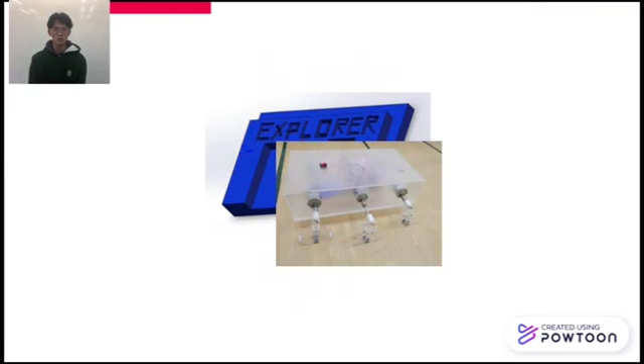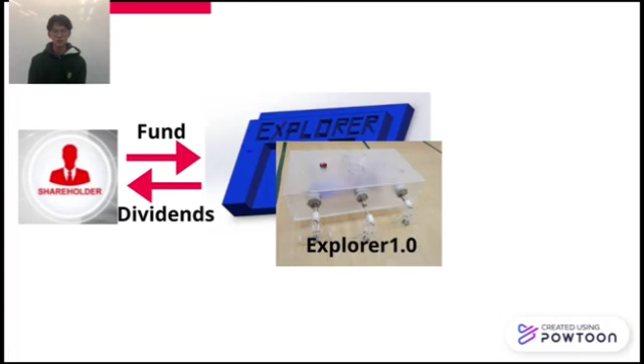There are two sources of investment. The main source of funds is from shareholders. Investors can buy shares of our company and provide funds for us. We will receive dividends once we make profits. In addition, since the project is a member of Shanghai Science Society, it is very likely that this organization will provide assistance for future development.

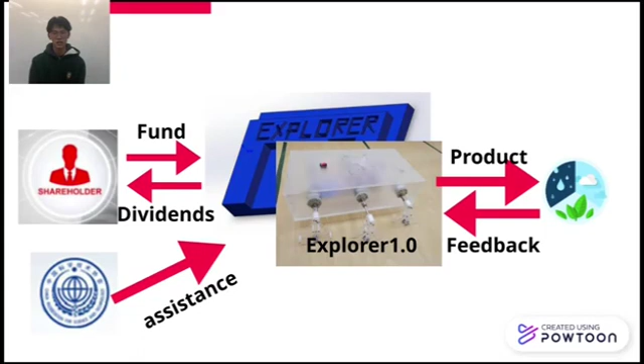After receiving enough funds, we will produce 25 Explorer 1.0 units for examination and development. We will sell these robots to environmental monitoring organizations for testing and seek improvements based on their feedback. After perfecting the design of the robots, we will produce the final product at a large scale.

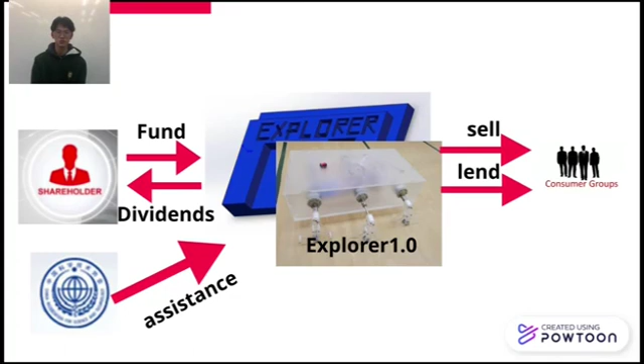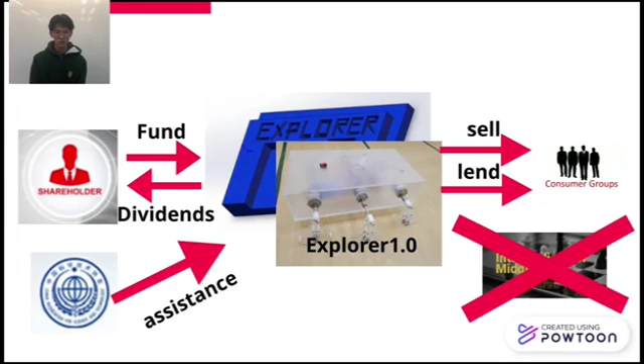In order to meet market demands, we provide two services for environmental monitoring organizations which need these robots for regular checking. We can sell these robots to them permanently. For individual investigators, we also provide rental services. After analyzing different forms of marketing, we decided not to sell these robots to consumers directly, since the market for this robot is relatively small compared to that of consumer goods.

We have done a lot of research about the global environmental market. The global market for environmental technologies, goods, and services reached $1.12 trillion in 2017. Then we did more detailed research about China and the US. First, the United States hosts the largest single environmental market, accounting for approximately a quarter of the global market.

The US industry yielded $342.2 billion of revenue in 2017. Second, in China, according to National Bureau of Statistics data in 2020, investment in water conservation, environment, and public facility management amounted to 8.75 RMB trillion, an increase of 0.2% year-on-year.

Also, China's environmental protection market is growing steadily. According to a report on China's environmental protection industry in 2020, published by the Chinese Academy of Environmental Planning, in 2017 total revenue of the sector was up 11.3% year-on-year to 1,700 billion RMB, of which revenue from environmental services was 1,120 billion RMB, an increase of 23.2% over the previous year.

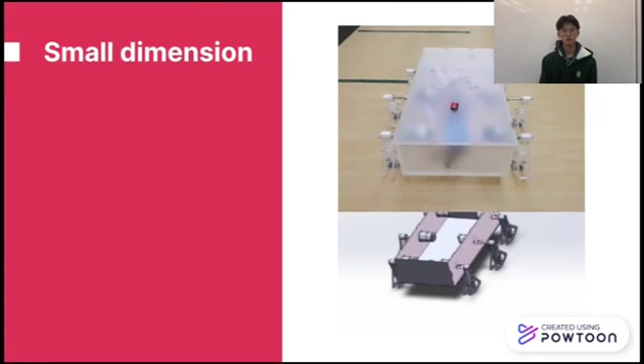In addition, the comparatively small dimensions of these robots minimize the risk of harming the local environment when operating. Human scientists, on the other hand, would threaten local creatures. The mechanical design of Explorer 1 gives these comparative advantages. Firstly, silicon is used to seal the robots and make them waterproof. Dryers are not used, to minimize cost and noise.

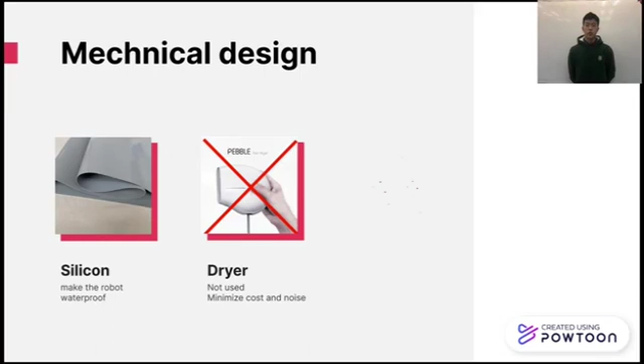Secondly, compared to robots with circular wheels, Explorer 1 can surmount vertical obstacles. According to experiments, Explorer 1 can step over obstacles with a vertical height of 13 centimeters, which indicates that the robot can move properly and step over natural obstacles like stones and shrubs. Compared to robots with feet, these robots can move at a higher speed. Experiments show that Explorer 1 can move with a speed of more than 0.3 meters per second, which is satisfying compared to similar products.

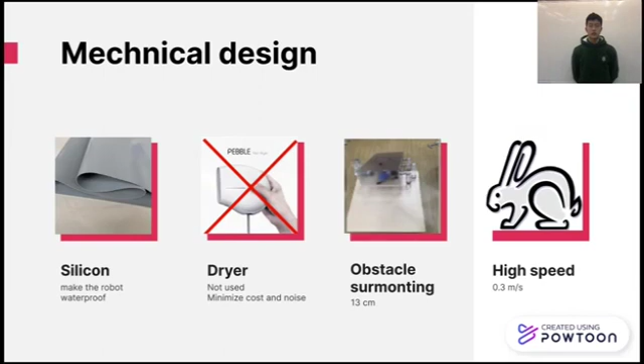In order to test the structural strength of fan-shaped wheels, stress analysis is used. Furthermore, simulation is used to examine the force induced by lateral waves. After adjusting the structure of fan-shaped wheels based on the results, 20% of the material is saved, and the force induced by 1 meter per second of lateral wave is reduced from 2.5 Newton to 2.1 Newton.

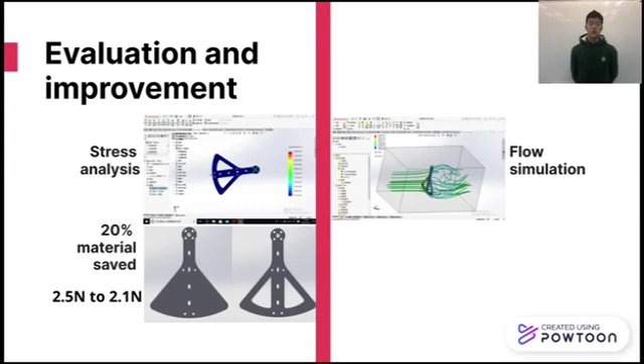Last but not least, Explorer 1 can be customized easily. Functional structures such as cameras and mechanical arms can be installed based on the consumer's demands. This is an innovative factor that most similar products don't have.

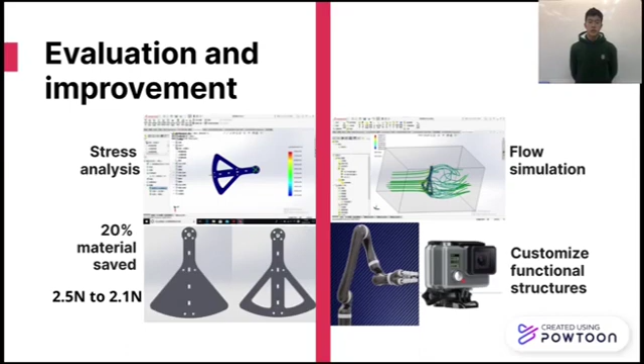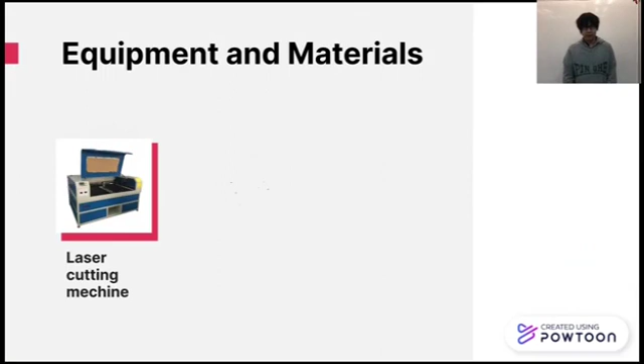Material and equipment also take a large proportion of the total finance needed. The equipment part includes the cost of a laser cutting machine and a 3D printing machine. The material part includes electronic components and PMMA plates that are used to construct the robots.

3-point estimation is used to take error rate into consideration. We use the most possible error rate for calculation, and it's worth mentioning that the workers' wages are based on the number of products they produce. Thus, the problem of free riders can be eliminated.

In order to prevent overproduction, we decided to only produce 50 robots this year, so we still have the opportunity to adjust our future plan. The cost is high since it includes equipment, and in 2023, 100 products are expected to be produced and sold.

At that time, our company would become profit positive. By 2024, we will be able to cover our costs and return investment in the form of dividends. So in this short period of time, we can already earn you some money, which is a pretty difficult thing to do compared to other companies.